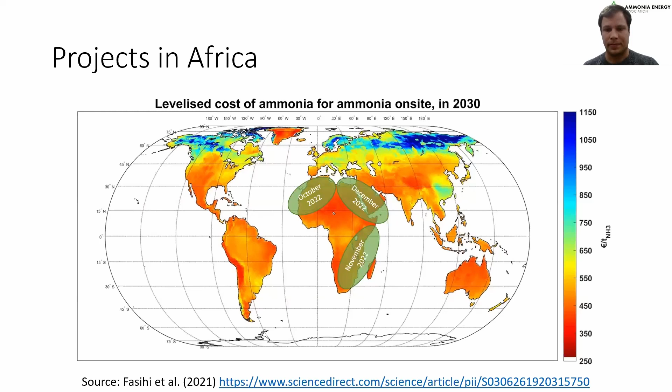And with that, I would actually like to introduce our first speaker of today. So that's Ralf Koekkoek from Maire Development. So Ralf, the floor is yours.

Yes, thanks, Kevin. So my name is Ralf Koekkoek, Project Development Manager in Maire Development. We are the project development company of the Maire Tecnimont Group. And we have been working already for quite some years on several power to ammonia and power to fertilizer projects, among others in Sub-Saharan Africa.

So Julian, if you can show the presentation, or is it on? Ah, there it is.

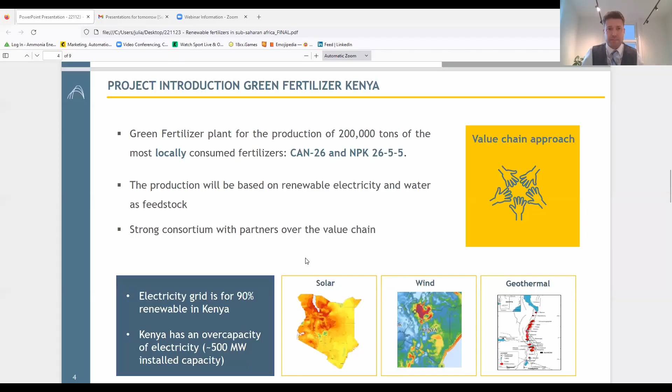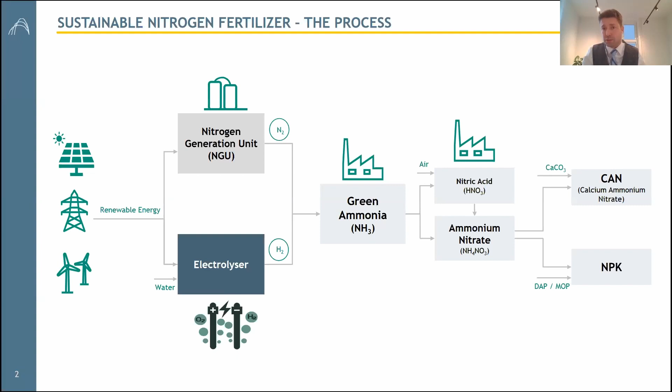Of course, there would also be an opportunity to go to urea in case there would be a green CO2 on the site. Next slide. If we look at our technologies, then we're part of the Maire Tecnimont Group. Our sister company, Stamicarbon, has developed a unique green ammonia process that we are using in these power to fertilizer projects, and that has several key advantages. One of them is the designed layout for a low capital expenditure. We see that especially if you go to a smaller scale, then economies of scale can have a huge effect on your business case. With this design, we have an optimal capex and therefore helping the business case.

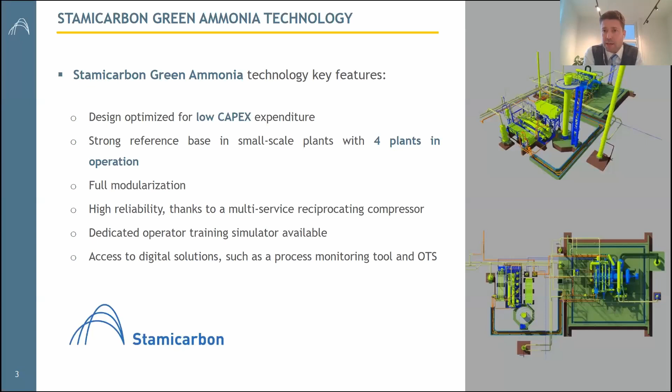There are not so many references of green ammonia plants worldwide in that size, but we have 4 operating plants in this size, so that's quite unique. And there's also a possibility to make modules from the plant and therefore have easy construction on site, and it has a very high reliability, which is especially important in remote markets. But also because we see that several companies are interested to start fertilizer or ammonia that did not have that experience before, for instance, electricity companies going downstream, we can also have training simulators available to train operators well upfront and provide digital solutions to help operate the plant in the best conditions. And that's part of the technology.

Then if we go to our project in Kenya specifically, there we are looking to produce 200,000 tons of nitrogen-based fertilizer, mainly calcium ammonium nitrate and NPK 26-5-5, which is used by the Tea Association. The production will be based on renewable electricity and water as the raw materials. And in the process scheme, as I showed, from those two raw materials, you can go down to the nitrogen-based fertilizer.

Kenya has a unique advantage in that perspective because it has huge renewable energy power with solar, wind, and geothermal, and therefore is ideally suited for such a power-to-fertilizer concept. What is important, and what we have seen in the last years for the development of such a project, is to involve the whole value chain.

So what we have done over the last 2 years is we have built up a strong consortium with equity partners like IPS, one of the biggest industrial conglomerates in East Africa, but also with off-takers, with a hydrogen company from Norway, to build a full consortium that can take care of the investment, the equity investment, but also of the off-take and further distribution of the fertilizer downstream in the market. And that really has proven to be a success to move the project and develop further.

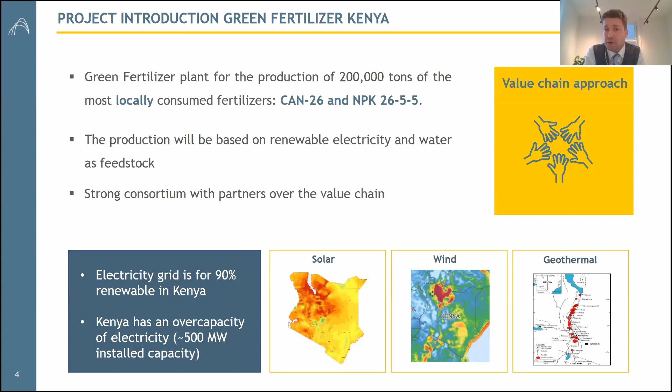Next slide. When we started the project, we were really focused on bringing sustainable fertilizer production and going from fossil-based fertilizer production to green fertilizer production. What we have seen over the last years, especially in the period of COVID, but now also with the conflict in Ukraine, is that fertilizer prices have increased so much that for Sub-Saharan Africa, it's not so much about having a green fertilizer project, it's about food security.

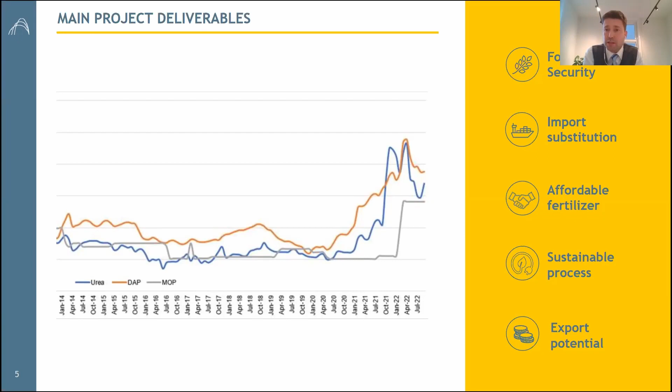It's about food security, making sure that your farmers have access to affordable fertilizer, to replace imports of fertilizer with local production in a sustainable process, and maybe even create an export potential to export the fertilizer to neighboring countries. But food security is really crucial.

For the location, we have chosen an inland location because this is a local production plant producing for the local market. So we have chosen the site of Oserian Industrial Park, which is located next to the geothermal power resources in Kenya, and ideally located for distribution further into the country. And that is really important for every project, to look at the specific dynamics of that project and the ideal site and configuration for such a country.

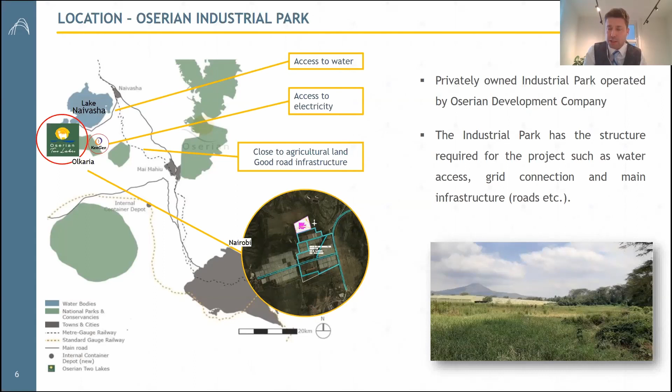Then maybe to end also with the slide that Kevin was showing, if we look at the potential of Africa for green ammonia production, partly for export, next slide, Julian, or for local fertilizer, then we believe the continent holds a true promise to use its natural resources to start industrial production of ammonia and ammonia derivatives. And as Maire Development, we're more than happy to support partners, local partners, in the development of their projects. Thanks.

Thank you so much, Ralf. That was quick, but also very nice to see the overview of the project that you're developing in Kenya. So with that, I would like to give the word to Marcel Jacobs.

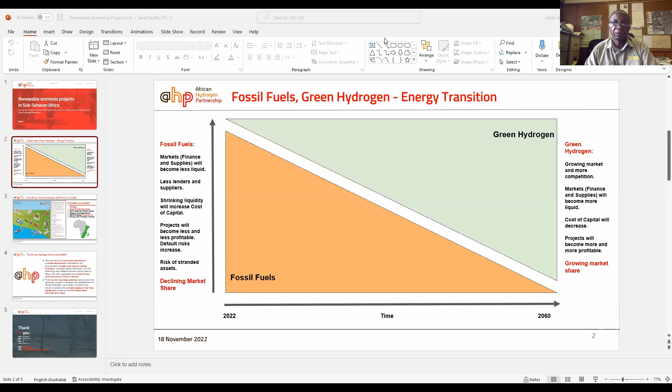Marcel, you're on mute. Kevin, wasn't Ellen supposed to be first? Here you go. There you go. Okay, so anyway, let's get started.

So as Alan will explain in his presentation, Sable Chemicals had been successfully producing green ammonia in Zimbabwe from 1972 to 2015. This was mainly due to, but he will explain it better than I do, very affordable renewable energy. So that actually proved that in the rest of Africa, it is possible to have a green ammonia plant, provided you can get renewable energy for an affordable price. Today, green ammonia locally produced can compete against gray ammonia imported.

However, it cannot today compete against gray ammonia locally produced, and that is where I want to talk a bit more. There is, and this is the slide indeed, a significant financial risk involved in investing in long-term old technology projects. If you look at this slide, this is basically the market share from fossil fuels against green hydrogen. So today, fossil fuels is about 100% of the market share, but in 40 years from now, it will be almost nil.

So that means that over the next 40 years, you will see a decline of market share from fossil fuels, resulting in less liquidity, increased capital cost, and projects becoming less profitable, potentially resulting in partial or full default, and in the worst case, risk of stranded assets. On the other hand, if you look at green hydrogen, over the next 40 years, market share will grow. Liquidity will increase, capital cost will decrease, and profitability will increase.

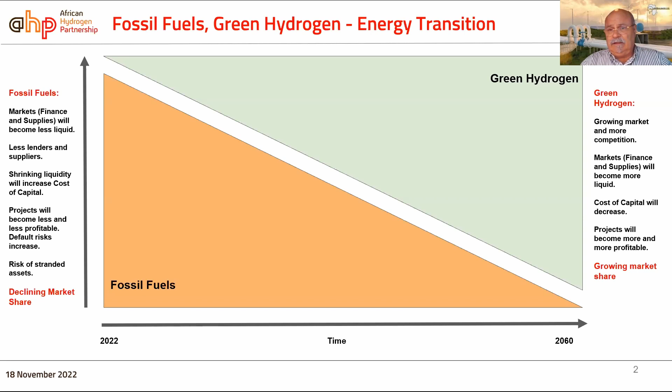So over the project life cycle of the ammonia plant, let's say 30 to 40 years, the financial risk of default for a gray ammonia plant is significant. In our view, AHP's view, it makes sense to invest today in a green ammonia plant based on low renewable energy cost. Next slide, please, Julian.

So this talks a bit about East Africa. Ralph already gave us a good overview of the potential of Africa, but Africa is a big continent. So if you then look where the biggest opportunities are, right now it's actually on the eastern side of Africa.

To have a viable green ammonia plant, in our view, you need three elements. You need low-cost renewable energy, and then we're talking about something like $30 to $35 per megawatt hour. You need cost of capital in the European bracket, 5 to 6%, and then you need local demand at close proximity. So if you look at East Africa, they have a potential for low-cost renewable energy with, as Ralph already said, geothermal, with solar, with wind.

We can combine several countries in a corridor that reduces the financial risks for a single country, and there's a large unfertilized agricultural potential. Right now, Africa per hectare fertilizes 20% of the global average. So there's potentially a very big market close by. And as I said before, today, green ammonia can compete with imported gray ammonia because of the transport component. So East Africa has all the elements for a viable green hydrogen ammonia business, hence the corridor.

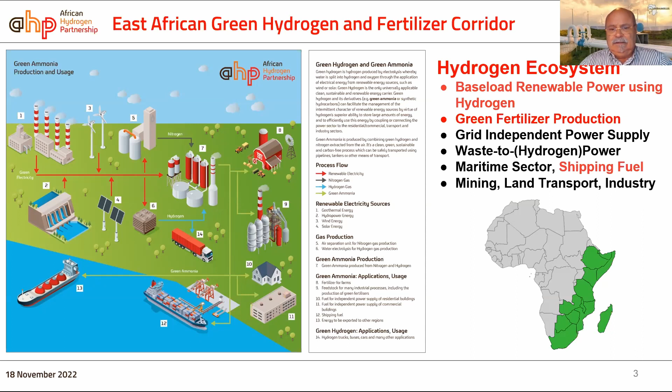Now, for the sake of time, I'll move on and talk a little bit about the African Hydrogen Partnership, which we invite everybody to join. The African Hydrogen Partnership, for which we are a pioneer member, is the only continent-wide African umbrella association dedicated to the development of green and natural hydrogen. It covers the whole of Africa, all African nations. It promotes fair business and strives to achieve the climate targets of the Paris Agreement and the UN Sustainable Development Goals. Membership is open for corporations and institutions.

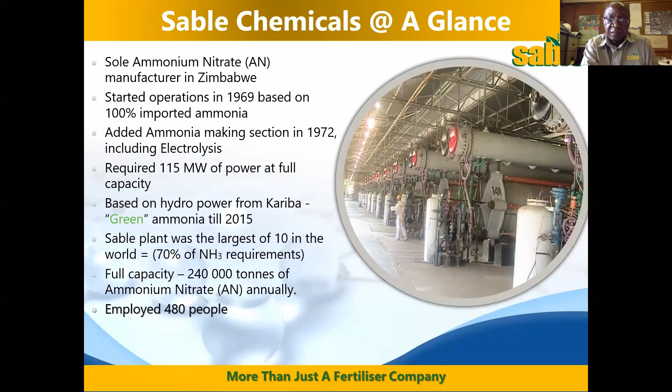And we used to employ 480 people. Right now, after the decommissioning of the other section, we are down to 300 people. What you are seeing in the picture there are the electrolyzers of the former electrolysis plant. Next slide, please. Thank you.

So this is a typical electrolysis process where you've got water coming in through a deionizer to purify the water. You've got AC current coming through a converter to DC, and then into the electrolyzer modules. And then out, you get your hydrogen in a hydrogen separator, as well as oxygen. In our process, the hydrogen is what we were looking for to take through the Haber process. The oxygen we were selling to a ferro manufacturer nearby. Next slide, please.

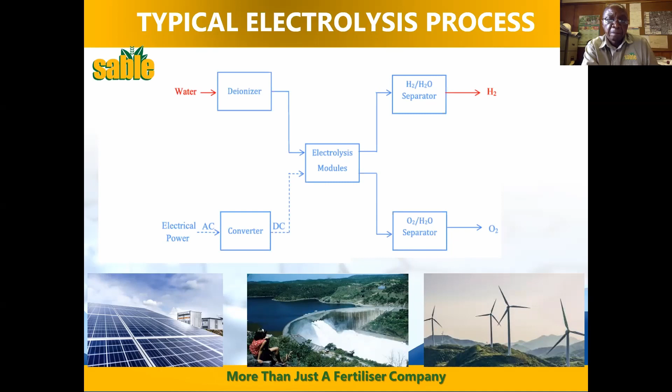So this is the Sable green ammonia process flow between 1972 and 2015. I will explain later on why we decommissioned this plant. What you see on the left, which is in red, is the electrolysis plant producing the hydrogen into the ammonia synthesis plant. Also the air separation unit producing nitrogen, and again going into the ammonia synthesis plant. And then from there, it goes into storage.

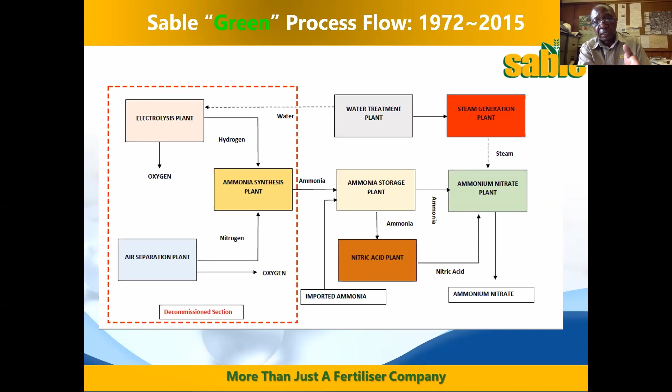From storage, you take some of the ammonia into the nitric acid plant to make the acid, and then the acid plus some of the ammonia, they meet in the ammonium nitrate plant, and then you get your ammonium nitrate. And like I said earlier on, 240,000 tons per annum is our design capacity. Next slide, please.

So what were the challenges with the model in 2015? What happened is the cost of power went up significantly. When we started the plant back in 1972, the tariff was less than 2 cents. And for a long time, we were on a 3 cents tariff, which is the $30 per megawatt. But the tariff started going up, and in 2015, it was 5.6 cents per kilowatt hour.

Right now, we are sitting at about 9 cents, and the projections are next year it will be around 11 cents per kilowatt hour. So because of the increase in tariff, it was not profitable to continue running the electrolysis plant.

Also, availability of power. Like I said earlier on, the plant was commissioned upon the completion of Kariba Dam in 1962, and there was lots of power. The country was not as industrialized as it is right now. The population was too small, so usage of power was limited, and there was lots of power. But in 2015, there was a shortage of power both in the country and regionally.

And one of the reasons was in Kariba, there'd been low levels because of sustained droughts, which led to low volumes of water in the dam, which also led to decreased generation capacity. The technology is also energy intensive, so you need lots of energy to be able to run this. And when you have shortage of power, then you can't run it. Next slide, please.

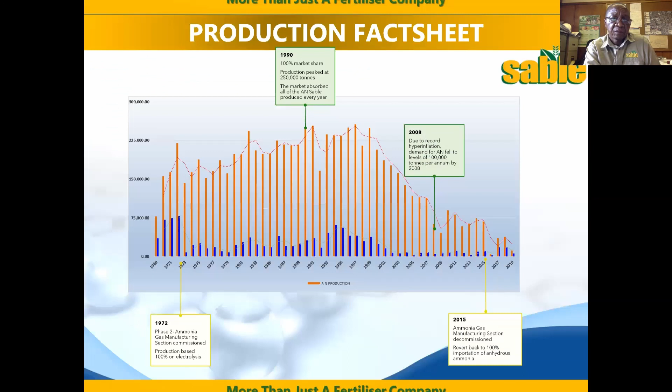This is a production fact sheet. It shows our production profile of ammonium nitrate from 1969 up to 2019. As you can see, between 1969 and 1972, it was purely based on imported ammonia, which is shown in blue bars. So you import the ammonia and then you convert into ammonium nitrate. And then from 1972, you can see that the imported ammonia, which is in blue, was falling down, and most of the ammonia that we converted locally was locally produced ammonia from the electrolysis plant.

And it shows that it can run sustainably as long as you've got enough energy, and as long as the tariff is sustainable, then it can be done. But you find that in the later years, it became a challenge to produce locally because the energy was becoming a problem and there was lots of load shedding. And because of that, we could not make as much ammonia as we wanted, leading on to the challenges that led to the decommissioning of the section in 2015. Next slide, please.

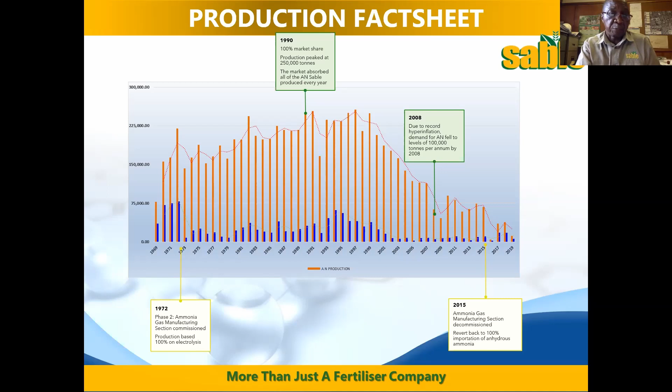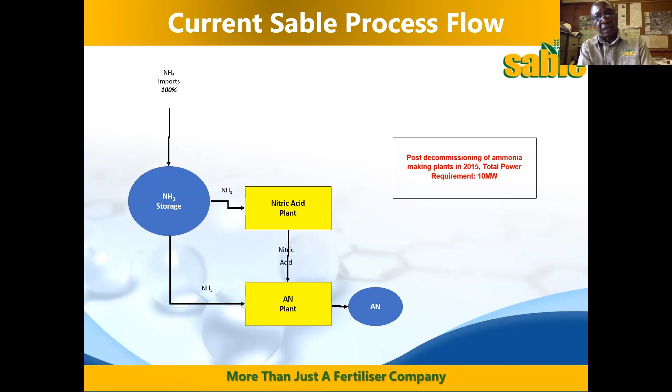So what is Sable doing right now? Right now, the model that we are operating is called 100% or total importation. 100% importation, ammonia goes into storage. Some of the ammonia goes into the nitric acid, and then some goes to the AN, and then the nitric acid and the ammonia meet, and then you make your ammonium nitrate fertilizer. Next slide, please.

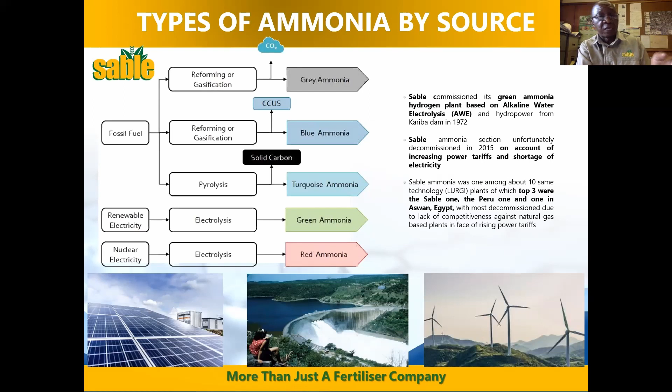These are the types of ammonia that can be made by source. So fossil fuel based, whether you are steam reforming, and then you can make your gray ammonia, or you incorporate carbon capture, you get your blue ammonia, or you can use renewable energy, and then you go through electrolysis, you get your green ammonia. This is what we did from 1972 to 2015. So we may talk about it as a new thing, but we have done it for 43 years. Next slide, please.

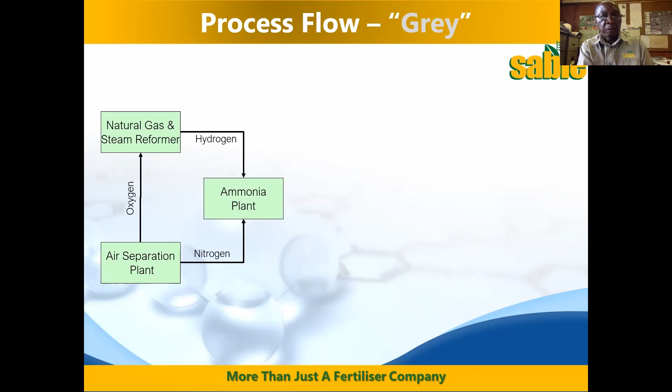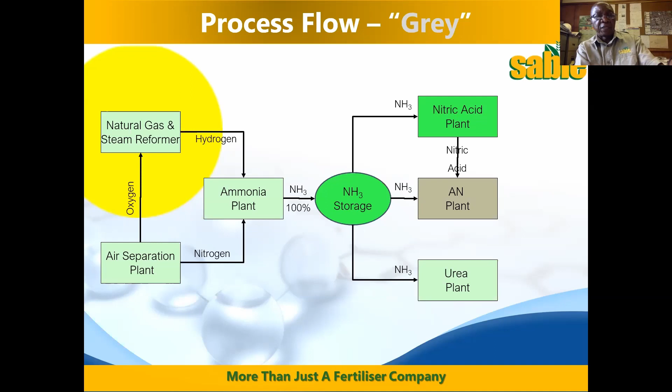So if you are making gray ammonia, this is the process flow where you've got your natural gas, take it through a steam reformer, then you get your hydrogen, air separation, nitrogen into the ammonia plant. Press, please. Again. And then you get your ammonia into storage, and then again, the rest of the process is the same. What is different is the process at the front end. Next slide, please.

So when we resuscitate the green ammonia process flow, this is how it looks. You've got electrolysis there. We are looking into newer models which are there. I know several suppliers are looking into this and they can supply this. And then we've got an air separation plant which is already there. We've got an ammonia plant which is already there. And then we produce our ammonia 100% locally into storage. And then again, the rest of the process is what we have already spoken about. Next slide, please.

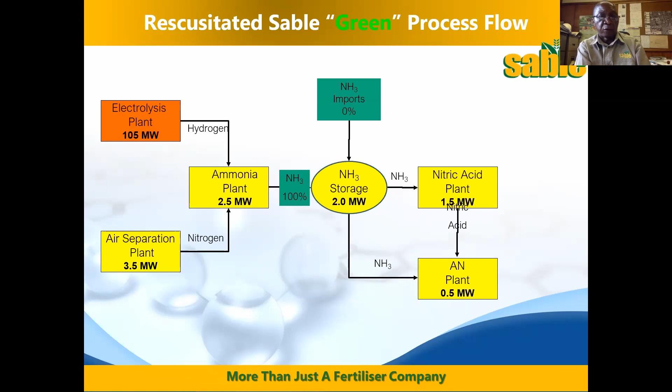So to realize what we are thinking of doing, this is the projected pathway. We need a renewable source of energy. And then technology readiness: I've already alluded to various technology suppliers who have indicated that they already have the electrolyzers that are suitable for this. Suitable infrastructure, government support in terms of an enabling environment to be able to implement the project. And then you have got offtake agreements if you want to sell the ammonia, if you are making excess. But for our purposes, we will need 115,000 tons per annum of ammonia for our own consumption.

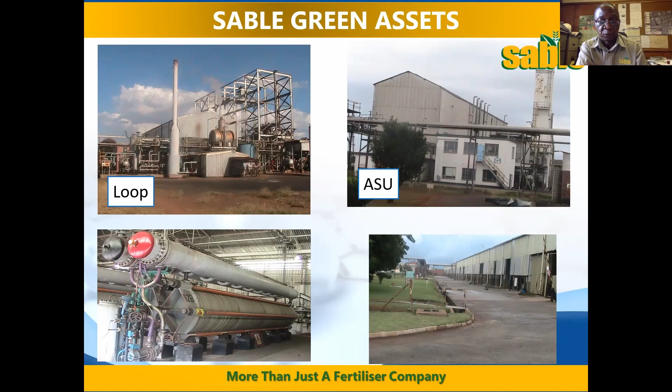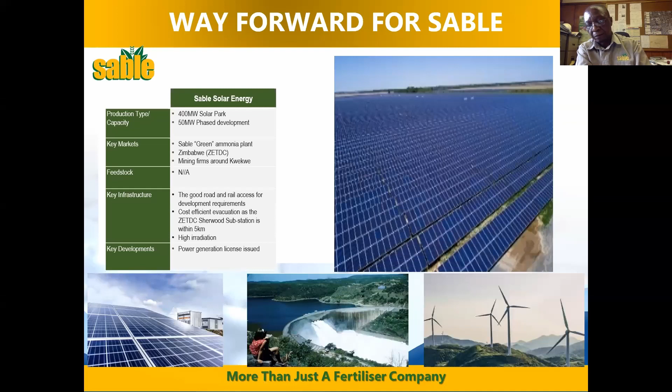What we need to be able to recommission the green ammonia process is solar energy, a PV plant, and we are actively looking into putting up one here at Sable. The Sable site is the second highest in terms of solar irradiation in the country. So we want to take advantage of that, and then we'll couple with the energy from Kariba, and then we are good to produce green ammonia once again. Next slide, please.

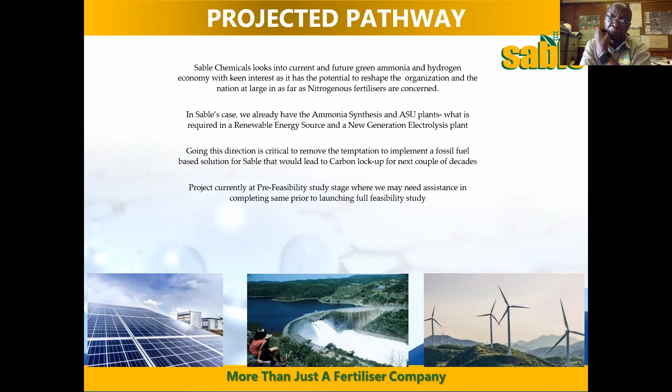So this is what Sable is looking at. We are looking at having the solar and then also combining with hydropower. And then we already have the ASU and the loop. What we also need to do is to find a technology supplier to supply the electrolyzers, and we are good to go. Right now, we are at a pre-feasibility study stage. Once we complete that, we hope that it will come out good, and then we'll be able to go right through to implementation of the project. That will be the end of my presentation.